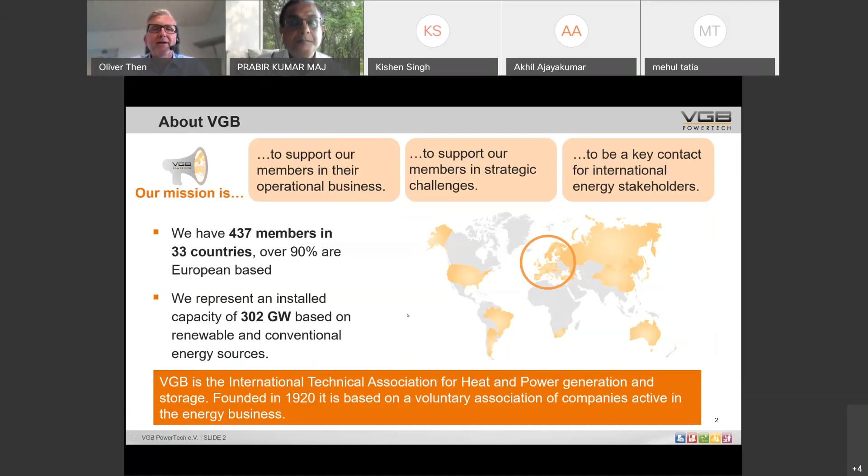Just at a glance, I don't want to run through it in detail, but it's been more than 10 years that we've been active in the Indian power sector, which fills us with pride and has been a very interesting and successful time, mainly in recent years working on the issue of flexibility, and nowadays still working on flexibility, moving also into hydrogen, which was mentioned by the American colleague in session 1 - hydrogen and power to X technologies being the logical continuation of power generation in the future. I'll give a short update on our recent activities further on.

At least in certain countries, and in spite of a still existing share of fossil-fueled power plants based on hard coal, lignite, and gas, this share has a decreasing tendency, because the major part of all investments into the power sector is definitely going into renewables, as is the case in India with the very ambitious goals the Indian government has set, together with the ambitious goals set here in Germany and Europe by the European Commission.

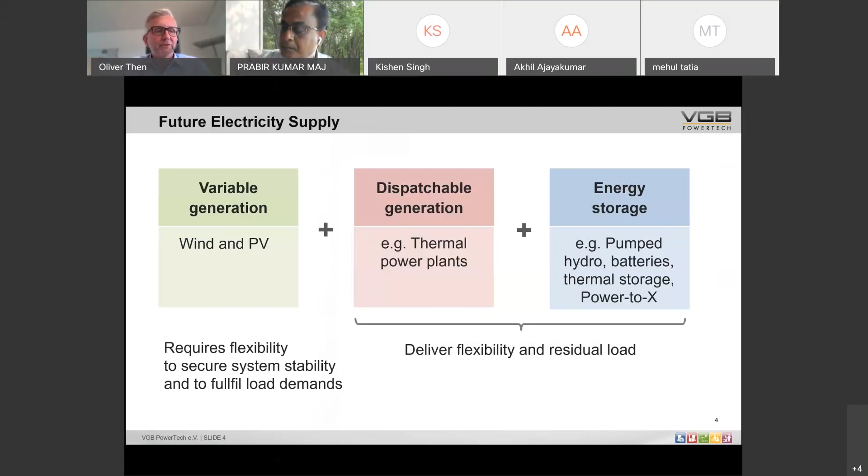But flexibility has an even wider approach. It goes down from day to hour, to minute, to second, to millisecond. And in the other direction, it goes from week to months and from months to season. So the requirements for flexibility are a very heterogeneous and complex environment.

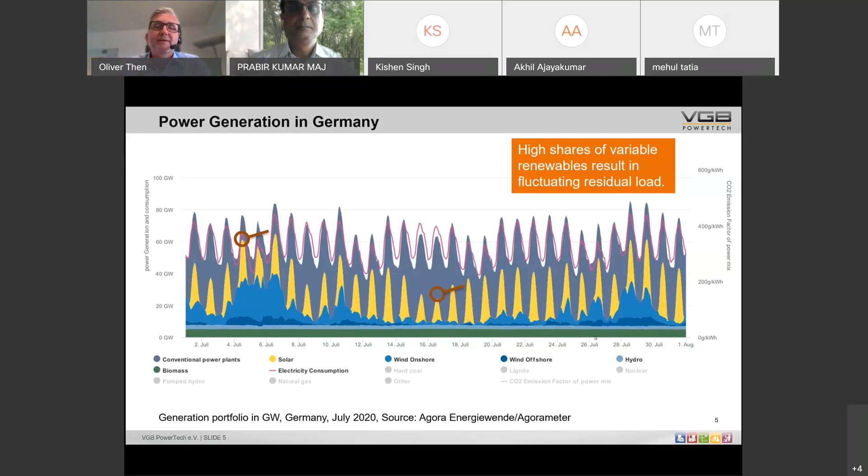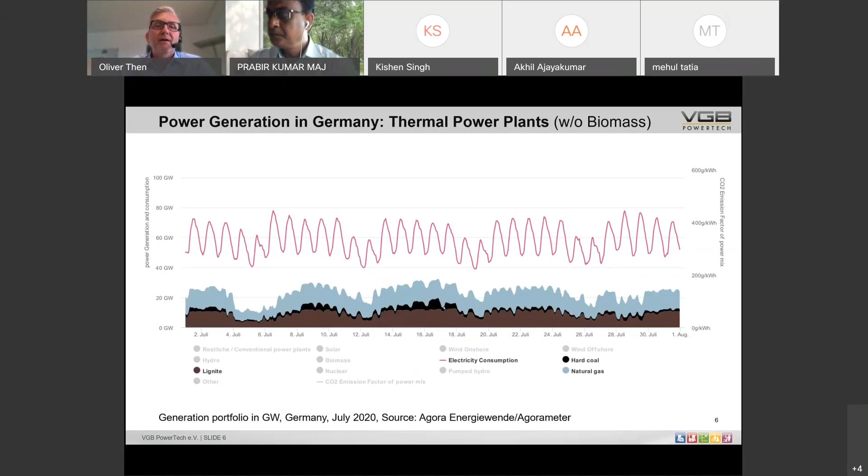Because it allows fast startup and meeting the requirements, and also being able to stay on the grid when there is a high injection of renewables into the market, because staying on the grid at low minimum load is in most cases much more economic than shutting down the whole plant.

And we are not talking only about the startup costs that come again and again if you have to shut down completely. We are also talking about the possibility to continue to provide system services when you are in minimum load. So if you're talking about voltage control or frequency control,

these system services, of course, can only be provided if the unit is still connected to the grid. The second one, advanced dynamics by high ramp rates for shutting down, for increasing and decreasing the load, is of course very important.

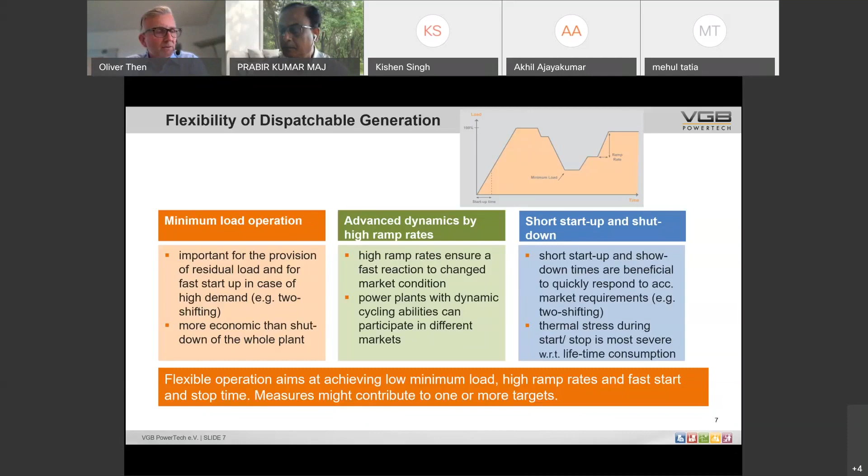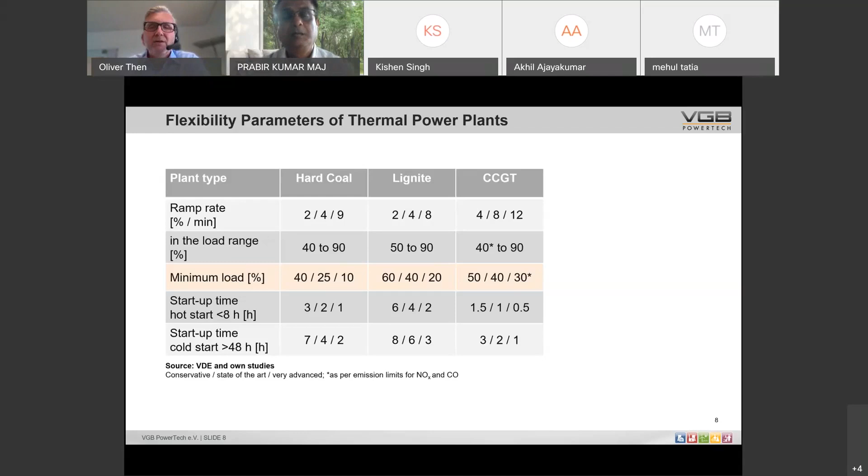So how can we move from left to right in these figures? These are just the keywords, and I think my fellow speakers will go into some more details in the following presentations. The first thing we have learned...

Two more minutes, two more minutes. So you have two more minutes. Please, okay, hurry up. Thank you.

It's a general optimization of instrumentation and control. A high level of automation is in any case beneficial for any kind of flexibility improvement. It's about precise steam temperature control, coal supply, drum level measurement, automated operation and switchover of pumps, fans, etc., and the inclusion of feed-forward control. So this high level of automation is beneficial.

It's crucial, and it's sometimes even quite easy to achieve with less investment. Combustion optimization is a second part, mainly composed of air and fuel coordination by advanced mill operation or advanced monitoring of combustion parameters, which sometimes need a little bit more investment.

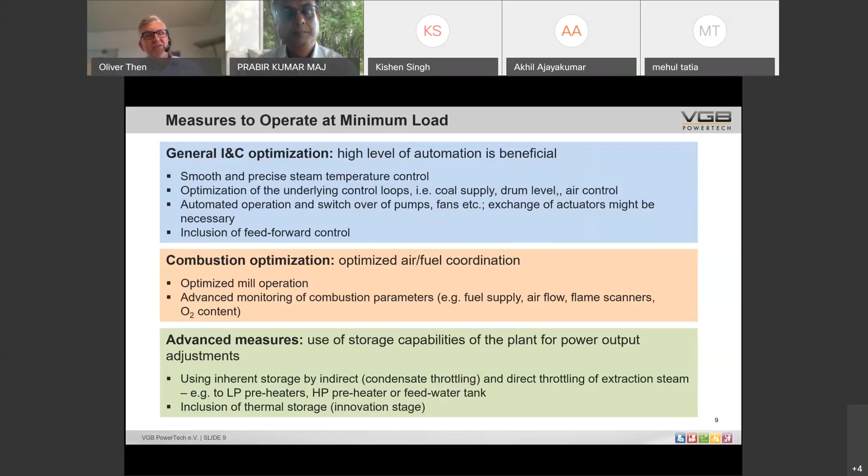And of course you have advanced measures like changing the operational regime, including new means for frequency and power control, or even the inclusion of internal thermal storages. So these are some measures that can be implemented here.

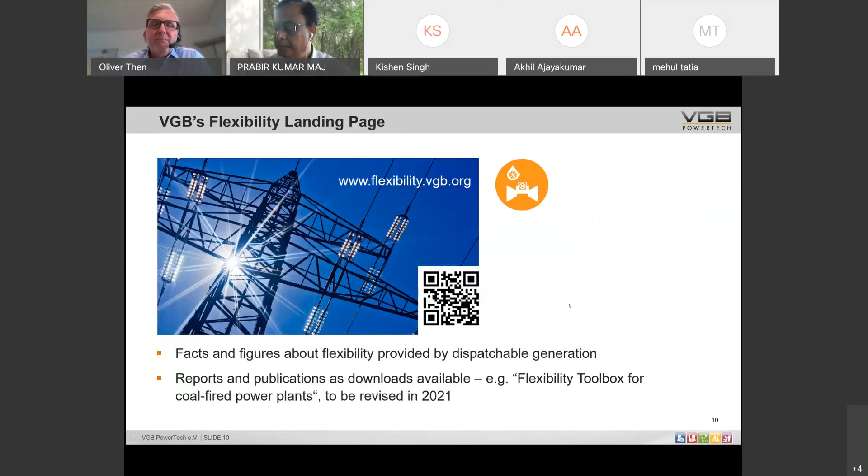We have provided a flexibility toolbox, which you find on our flexibility landing page. Under this URL on the internet, you can find this and a lot of other information for download for free. I can really guide you to this site, our flexibility landing page, where you find an overview of all potential measures that can be implemented to achieve higher flexibilities.

And just as a last slide, the outlook: we have done successful projects, for example at the Dadri power station together with NTPC in a project sponsored by the Indo-German Energy Forum. We have achieved very good results regarding minimum load and ramping tests, as you can see here.

The project was so successful that we are now continuing this in a follow-up project under the Indo-German Energy Forum for further tests and optimizations at the Andal power station operated by DVC and the Maithon unit operated by Tata Power, spreading out the results and learnings also into the IPP sector.

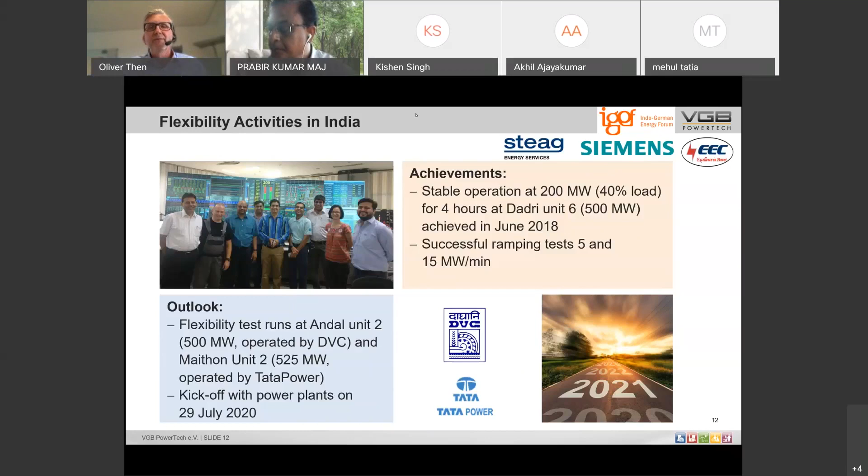And of course, we hope to continue this with all interested power plant operators in India to give our contribution to the further development of this sector in India and to allow more inclusion of renewable energies in the future. If you have any questions, please feel free to contact me, and we would be happy to provide you with more information.

I would also like to address our partner organization in India, the EEC, Efficiency Enhancement Center for the Indian Power Sector, which is cooperating with us to coordinate these projects and take care of the dissemination of results from our experiences in India. Thank you very much for your interest, and I'm open for questions later on. Thank you.

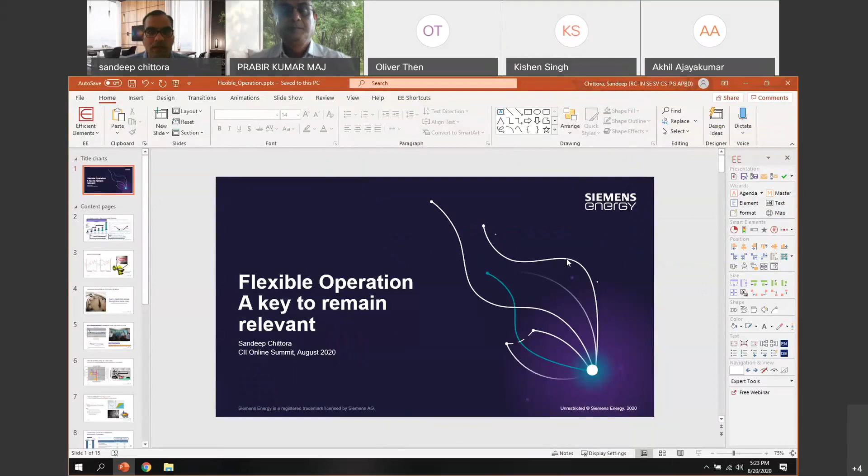So the scenario in India is that currently we are operating close to 370 gigawatt installed capacity, and in that we have 206 gigawatt of thermal power plants.

What we see is a typical scenario: in 2022, as projected by CEA, we will require close to 180 gigawatt of generation during the entire day, or close to that. Thermal-based generation will be 130 gigawatt, but as soon as solar starts coming up or picking up from morning to peak noon, we need to lower our thermal capacity to balance the grid.

This 130 gigawatt is expected to go down to close to 45 gigawatt, requiring a ramp rate of thermal-based generation of around 200 megawatt per minute. Then as soon as solar goes off during the evening, we will have to pick up the load from thermal-based generation, and this ramp rate would be around 220 megawatt per minute.

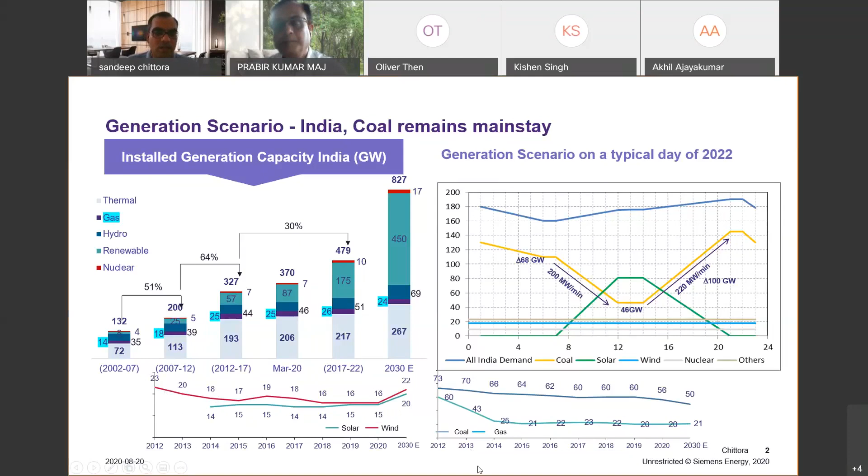So solar will start picking up slightly with renewable integration and with the technologies that are coming up from the thermal sector as well.

Because of this cyclic operation, forced outages based on the number of starts are increasing, as shown in a study done by VGB. If the number of starts increases, the number of forced outages also increases in the same relation, so we see a direct correlation between the number of starts of the machines and forced outages.

On the second graph, we see the equivalent full load hours, meaning if my units are operating almost at 100% load, and if the equivalent full load hours is 50%, it basically means the PLF is 50% on an average basis. So we see that if the equivalent full load hours are decreasing, meaning PLF is decreasing, the number of forced outages is also increasing. It's an inverse relation between equivalent full load hours and forced outages.

We have also observed that on thick wall components, cracks are getting initiated and starting to appear, and this is what we need to address.

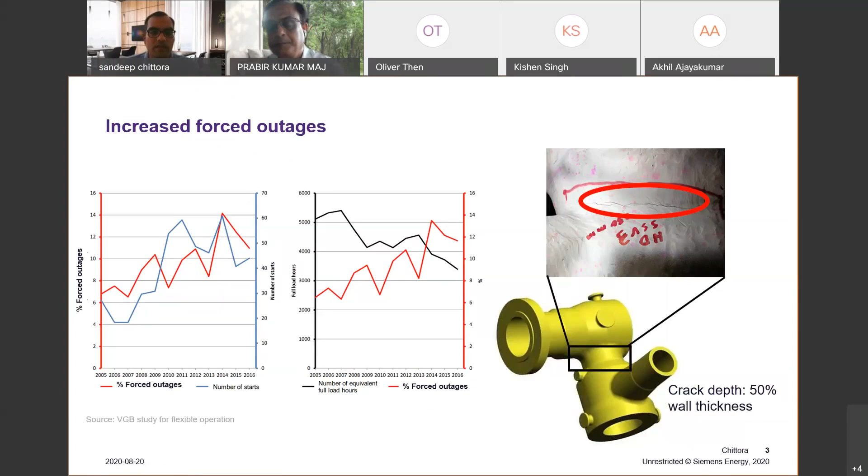We need to have reliable operation in order to bring these coal-based power plants to a lower load, and then also participate in renewable integration in the grid.

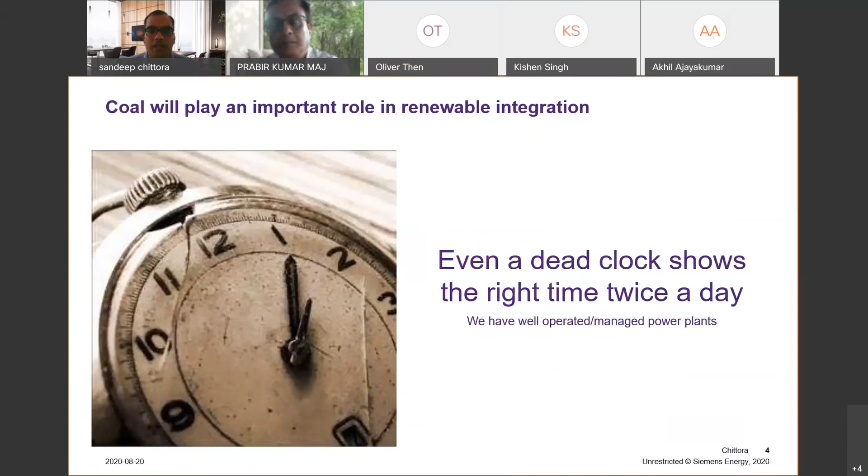So my thought is, even a dead clock shows the right time twice a day, and we have quite well-operated and managed power plants. I think we shall be able to do much better than the scenario where PLF is dropping heavily and renewables are coming in. But coal will also have to play an important role in this renewable integration. This is my thinking, and I will elaborate in my subsequent slide. We have achieved 40% technical minimum, and this is possible.

This we have done together with VGB, which was my former presenter here, and NTPC, which will be done subsequently. As a combined team, we have demonstrated that 40% is possible on Indian coal conditions without oil firing, so nothing to worry about. I think all 500 megawatt units, once we go step-by-step, we will be able to achieve close to 40% technical minimum.

The advantage of bringing thermal power plants to lower load is that we will be able to mitigate CO2 emissions generated by these plants by augmenting solar. Our estimates are that this will be close to around 100 million tons of CO2. The coal conditions used had already high ash and high volatile matter present at this time, but we will also be testing for other volatile matter coal conditions, and we are hopeful we will achieve successful demonstration on these as well.

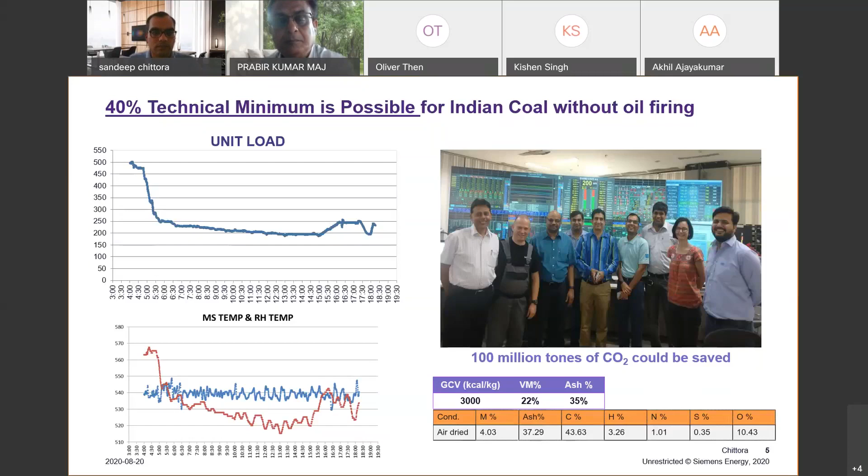The major thing an operator can do to reduce or improve the thermal life of components is two-fold: if he is able to reduce the temperature gradient, which is how much temperature change happens on a component, from 1 Kelvin to 10 Kelvin per minute. If the amount of temperature gradient starts dropping, then we are able to allow more load cycles on a component, which means higher life.

On the other hand, as a designer, if we are able to design the component so that the temperature gradient across its thickness is as small as possible, or the component as thin as possible, then with a lower temperature gradient we are also able to allow higher load cycles. So there are two ways to achieve better fatigue performance in the component.

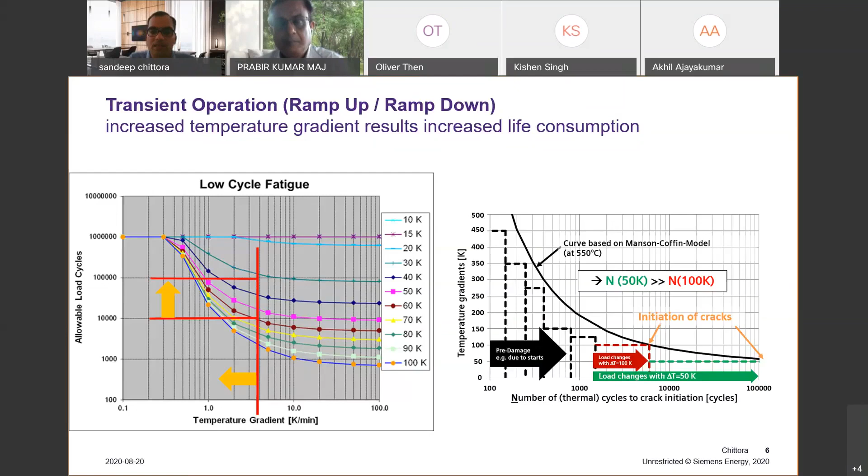This is another way we are able to convert any cold start into, let's say, a warm start. What we are doing here is providing an electrical jacket on the HP and IP turbines, and as soon as we want to start the unit, we can start this electrical heating so the component gets heated up quickly, and we can start the unit faster.

The advantage of this is that once we do a boiler start, we don't have to wait for the turbine to come up to temperature before rolling it. In this way, we are able to reduce the startup time by as much as 60 minutes compared to prior, which means we also reduce oil consumption and reduce the cost of the start. Similarly, we will also reduce the number of operating hours, and the life of the component will improve.

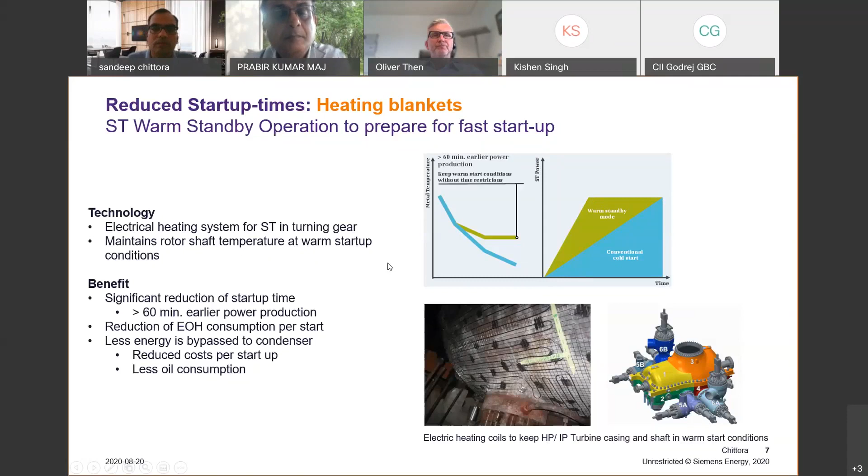So this is a faster startup method that we are seeing. Now I'll present a scenario wherein, like, it's an economic case which I think is beneficial for the grid.

We are assuming that currently the entire optimization, which is on 500 megawatt, is happening because the rated capacity is 500 megawatt, and we see the technical minimum, let's say 50%, coming to 250 megawatt. With modernization of this unit, we can improve this 500 megawatt output to 550 megawatt, and also reduce the technical minimum to, let's say, 40%, to 200 megawatt.

So what happens is, if I have unit A, which is at a pit head station of 500 megawatt, and unit B, which is off-pit and will see the flexibilization, the current operation happening is 500 megawatt here and 300 megawatt here.

If I assume a variable cost of 1.3 and 3 rupees, the annual cost of operation comes out to be 1358, summing together both units.

But in the proposed operation of 550 megawatt and dropping this 50 megawatt to the other unit, our new estimated cost of operation will be 1.25 and 3.05. Based on this, we see that we are able to operate both units, summing almost 800 megawatt, at 1270 crore. So this will give us a saving of 88 crore annually by just optimizing the units together, or putting two units together.

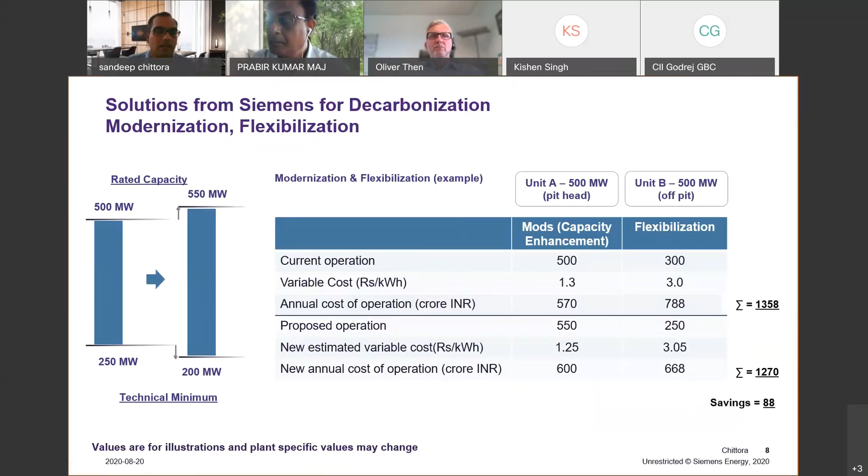A concept which we have introduced in our supercritical unit can also be introduced for 500 megawatt and even 210 megawatt units for improving the faster ramp up. This is again coming together with the electrical jacket as well.

What we are doing here is we are able to reduce the inner casing thickness so that the startup of the unit happens faster. And since they are able to have the faster startup, we save costs.

Similarly, they are also given with interstage admission or overload admission, so they provide the better ramp rate requirement. So if we want to improve the load quickly, we are able to introduce this overload admission and support the grid.

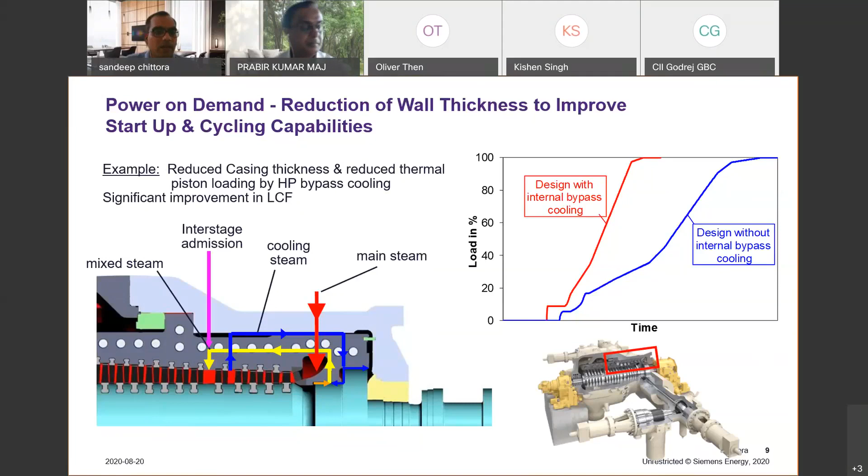In order to monitor what is happening on the steam turbines, we have EOH 4.0, which will account for all the load changes, all the thermal fatigue that is happening, the type of starts that you have taken, and also the actual hours that the unit has operated.

So it will give you equivalent operating hours, meaning an accurate counting of how much life has been consumed for the component.

Based on this, you are able to decide whether you need to take a shutdown, whether you need to really do the maintenance of the unit or not, or whether you can prolong your operation. So this is a solution which comes very handy in order to provide the maintenance of the power plant.

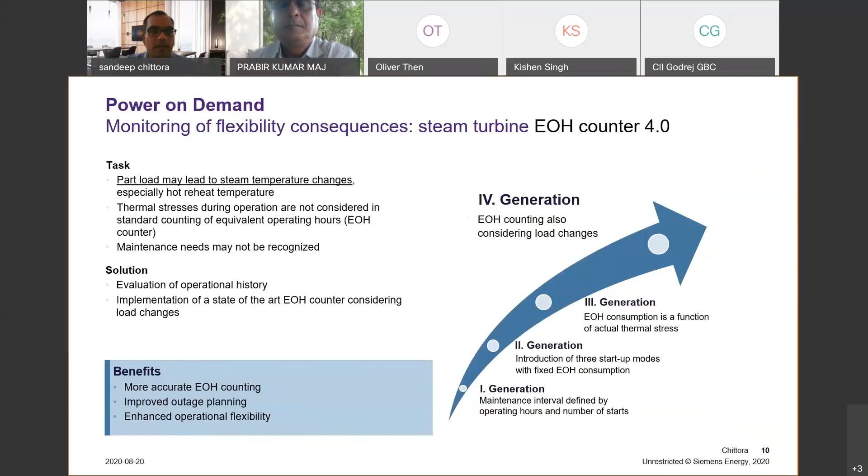Now comes up a unique solution, or I would say a question comes up: once we operate a unit at part load, how do we improve the efficiency?

This unique solution is we are able to introduce a top heater. This top heater actually operates at part load, and once it operates at part load, we are able to maintain the final feed water temperature constant. Since we operate the final feed water temperature constant, the heat load on the boiler reduces, and that's how we are able to improve heat rate.

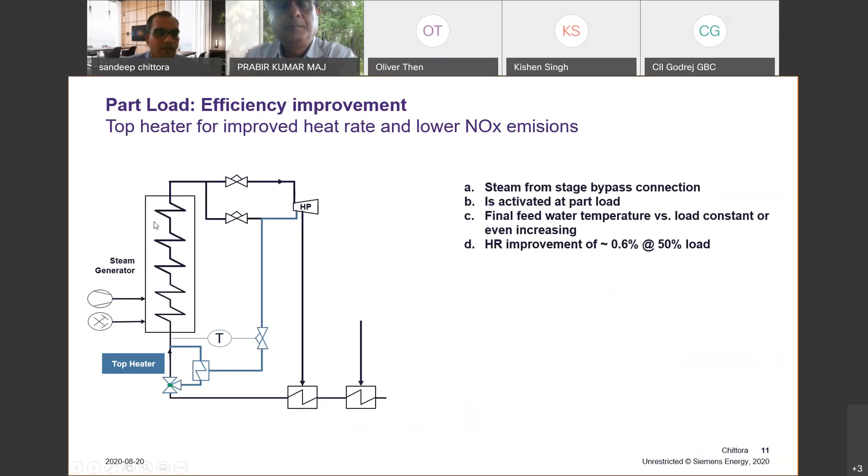This we have demonstrated in a plant in China, Waigaoqiao, which got commissioned in 2008. And we are seeing the heat rate improvement close to 0.6% at 50% load.

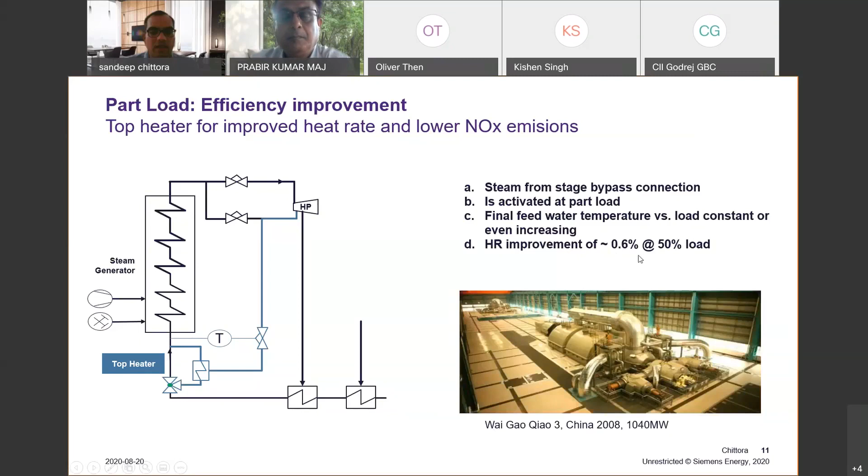Sure, sir, I think it's mostly already done. So if we see that top heater, in normal operation, as we go to part load, it starts dropping. But with the use of the top heater, we are able to maintain the temperature of the final feed water, and that's how we are able to improve the heat rate of the unit.

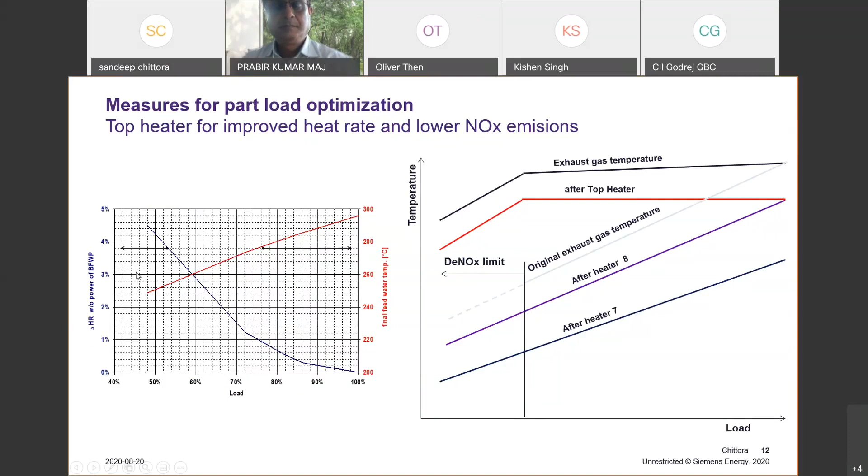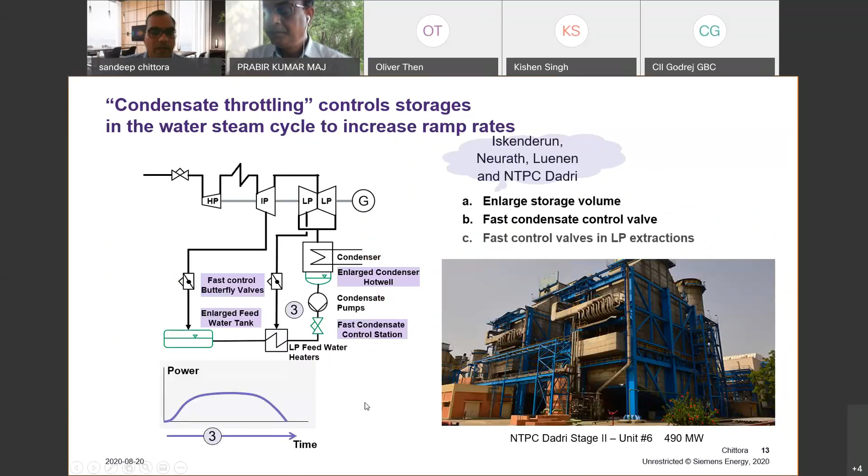Condensate throttling is another unique feature we have done at NTPC Dadri, which is able to provide a fast response to the grid by closing the LP extraction.

First of all, it is political in the sense that it will provide energy security to the country, and that is why we see that it gives us a large potential.

It is economical if we combine it with modernization, which will reduce the cost of operation, as an example I have presented today. It is also social, meaning we can create a lot of jobs and also skill development, because the transition will be smooth.

We have proven technology available, and it will get further developed as the requirement comes in. We work within the legal requirement or legal framework itself, meeting whatever regulatory emission requirements are in place.

And ecological, in the sense that we will be able to reduce the carbon footprint of the country by reducing the load on thermal to integrate renewable energy in the grid.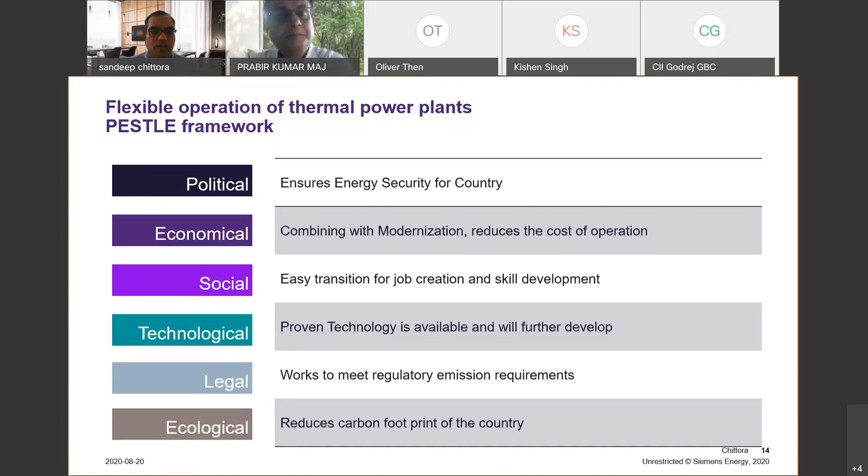With this, I end my presentation. I'm available for questions, and for anything that comes up, you can always contact me on these flexible operations. Thank you.

Thank you, Sandeep. Very nice presentation. You have left a lot of thoughts which, whether you can be connected, maybe the users can take benefit out of that.

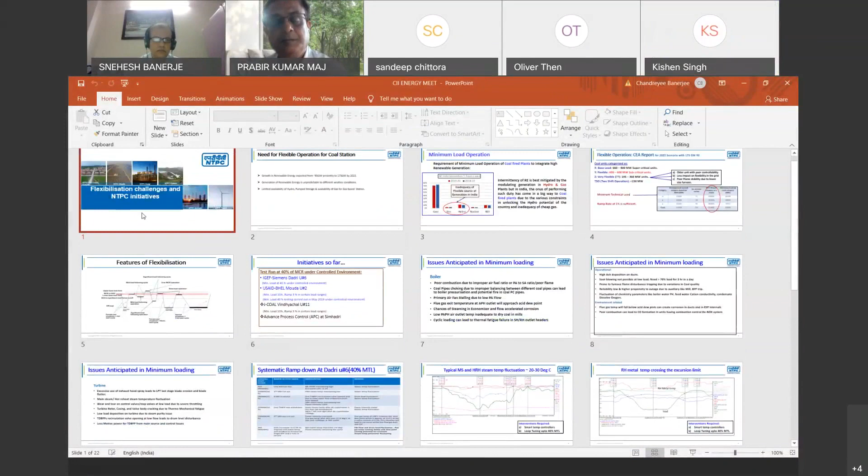Thank you so much, Mr. Majumdar. In fact, all three of us, the panelists, are working together unitedly in the mission of succeeding in this particular aspect, the flexibilization challenges in India. In fact, VGB, Siemens, and NTPC together had taken up some pilot studies, and based on that, we have developed the foundations of moving ahead.

Sir, probably you have touched upon this 85 gigawatt of power, renewable energy, which is unpredictable and with different weather conditions, and the limited availability of hydro, pump storage, and other gas stations really force that there is no other option but to flexibilize the coal units.

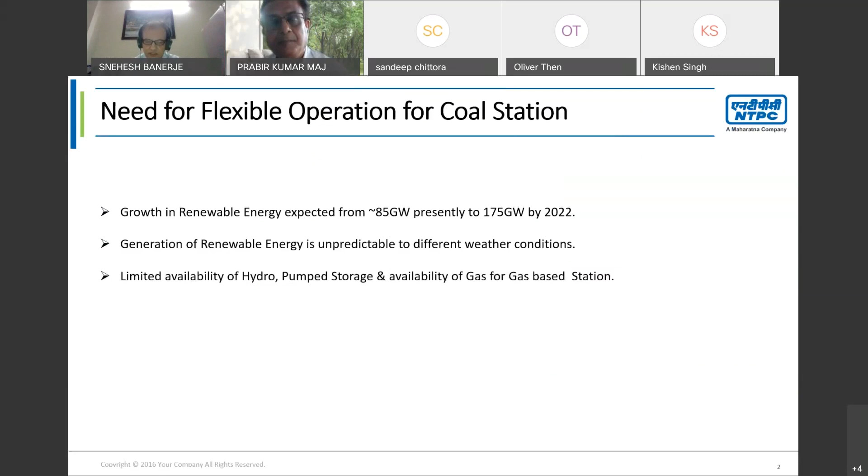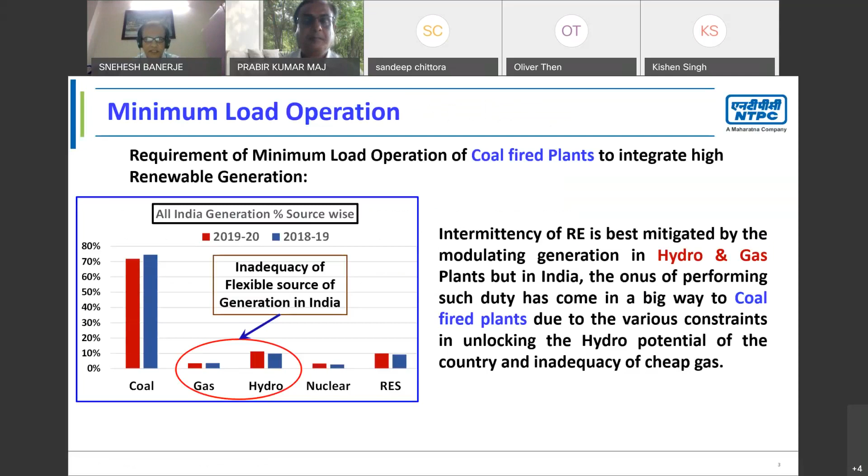In fact, the flexibilizations are being recommended to the extent of minimum loading up to 40%. It is visible in different CEA reports that by 2022, when 175,000 megawatts of renewable power comes into the grid, we may have to come down up to 40%, and even then there may be some units which will be under reserve shutdown.

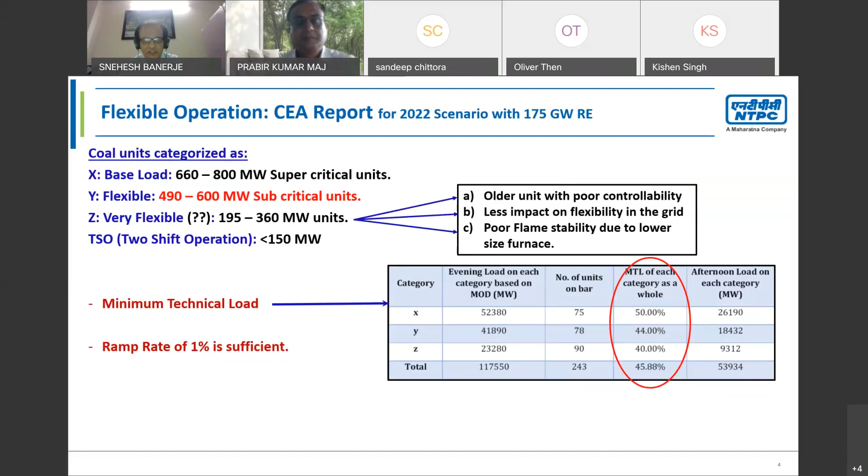As we are witnessing nowadays, either the units are running at full load or units are in stop conditions, in reserve shutdown conditions. Even very high efficient units, the supercritical units, are in stop condition, because they are located in non-pithead areas and their power cost is a little bit on the higher side, even though they have an efficiency heat rate to the tune of 2000, 2100. This is the situation in India nowadays.

The features of flexibilization have multiple facets that I want to touch on here. First of all, the reserve shutdown. Reserve shutdown is also of different types. It can be a very short shutdown, short duration, 1 or 2 days. It can be a 7 day duration shutdown, or it can even be a months-long shutdown. Some of our units are shut down for months, so the approach of addressing all those reserve shutdowns is entirely different.

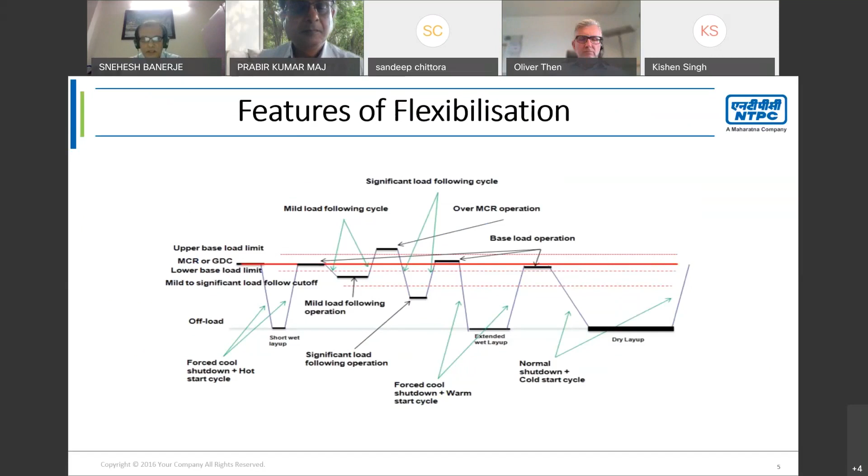The way we should handle a shorter wet layup will be entirely different from the dry layup, what we normally do for units which are under shutdown for months together. So these are the different aspects of reserve shutdown.

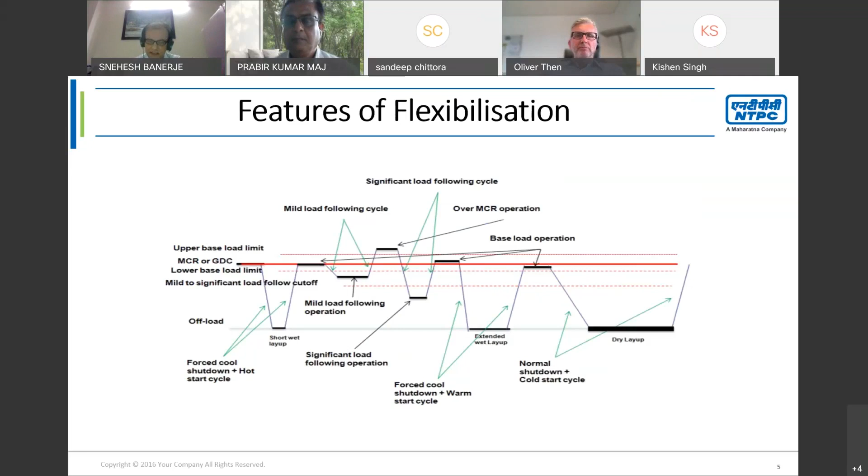Apart from that, there are minimum loading operations, significant load following, maybe minor load following of 30, 40 megawatts, and all these different dimensions of flexibilization we are witnessing in NTPC across different fleets. Apart from that, RGMO and the grid response methodologies are also part of it. I think this should also be covered in the flexibilization gamut. So altogether these are the aspects of flexibilizations.

The major thrust of the study was minimum loading operations with a higher ramp rate to the tune of 3%. As we have seen, VGB experience shows they are having 4%, even 9% ramp rate. But in Indian conditions, the concept of ramp rate is a little different. What we perceive as ramp rate is from technical minimum load 55% to full load 100% in one go - only then can we call it a ramp. So it is not a smaller load range ramp, it is a very larger load range ramp that we are experiencing and pursuing.

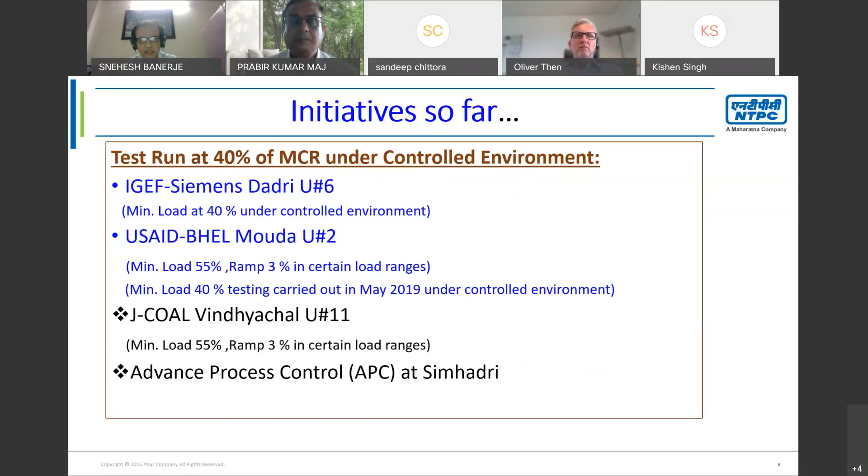And advanced process control, that is another flexibilization approach we are taking at Simhadri. So multiple ways we are pursuing this, and now we want to touch upon the issues which are really affecting our power station's life - the impact on power station equipment through flexibilization.

These are some aspects we want to highlight here: poor combustion, the compromise in the combustion regime due to improper air-fuel ratio, primary-secondary air ratio. There may be coal pipe choking, improper balancing in different coal pipes. There may be primary air fan stalling due to low primary air flow at 40% minimum load.

Flue gas temperature exit at the air preheater can approach the acid dew point, which can come down around 105 degrees centigrade. There are chances of steaming in the economizer as we come down to lower drum pressure, with the saturation temperature - at that point economizer steaming can take place. Similarly, low air preheater temperature sometimes can lead to situations where coal drying will be an issue. The cycling loading can lead to thermal fatigue in the superheater reheater outlet headers.

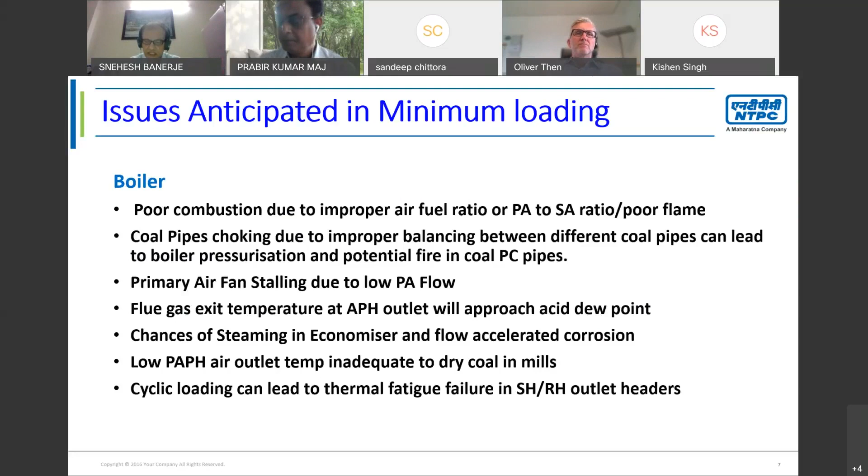So these are some aspects, but one thing is sure - the boiler is the worst hit across all the gamut. On the operational aspects, I want to highlight: high ash deposition on the ducts, soot blowing is not possible at low load. These are operational problems - prone to furnace flame disturbance, tripping due to variation in coal quality.

When we run the unit at 40% minimum load, we have to run with 3 mills. The tripping of a single mill can lead to the tripping of the unit. So that sort of uncertainty we are passing on.

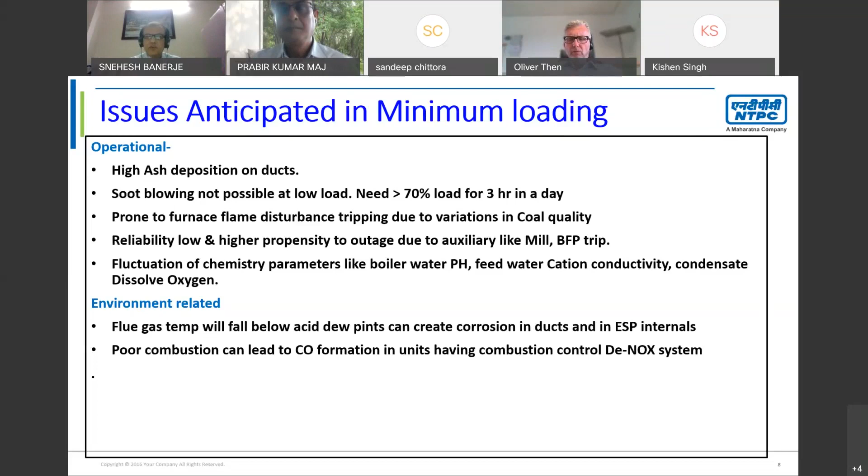Similarly, the fluctuation of chemistry parameters, as we rightly said in the beginning, is very crucial with respect to minimum load operations. And some environmental aspects are also there - flue gas temperature falling below acid dew point, and poor combustion can lead to CO formation.

Similarly, in the turbine, though it will follow, it will not be immediate. The effect on the turbine may not be immediate in nature, but there are steam temperature fluctuations, excessive use of exhaust hood spray in the LP turbine last stage, wear and tear of control valves because of severe throttling, and low load deposition due to poor regime chemistry on the turbine. So these are some of the effects on the turbine.

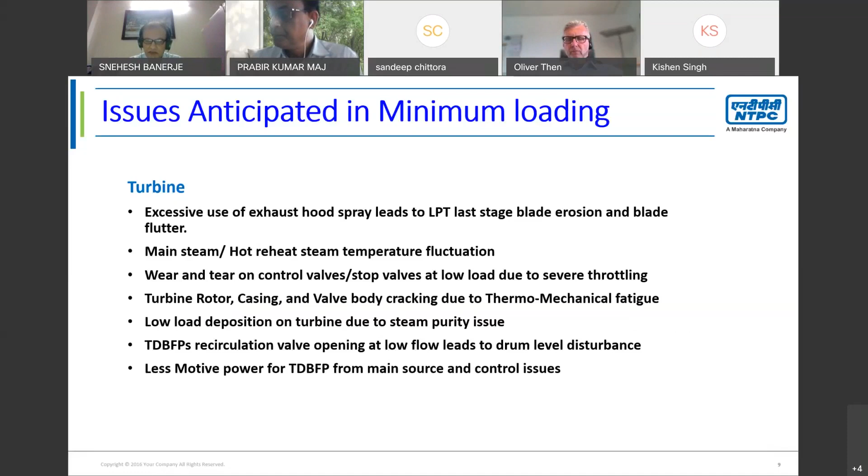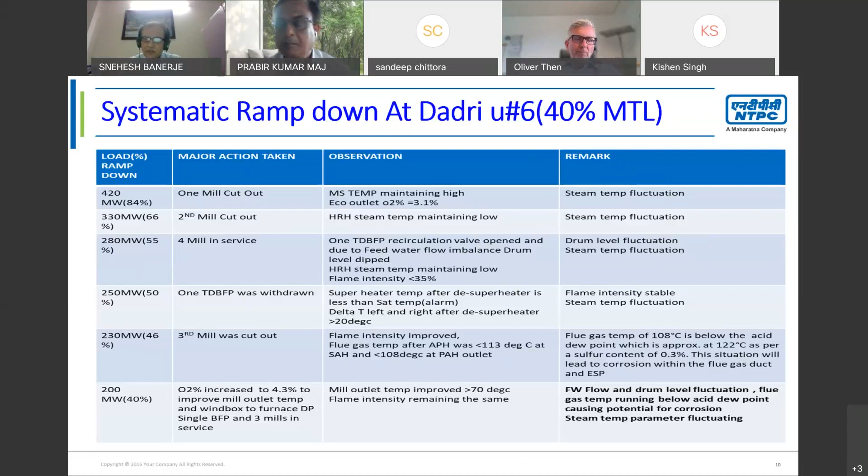This slide shows how we come down to minimum loading at unit 6, where we achieved 40% minimum load. The last column, the remark column, shows it was successfully operated at 40%, but with the caveat that there are a number of variations in terms of parameters - steam temperature variation, drum level fluctuation, flue gas temperature coming below acid dew point. So the parameters deviated in multiple ways.

And this is the area I'd like to highlight here - how different important parameters can fluctuate and deviate during minimum loading and higher ramp rate operation. When we operate at a higher ramp rate, our main steam and HRH steam temperature will fluctuate, maybe to the tune of 20 to 30 degrees centigrade. But these fluctuations will lead to issues.

As our friends from Siemens have told us, this can affect the fatigue of the equipment. So temperature fluctuations need to be minimized to certain limits - 8 degrees, 10 degrees, 15 degrees - that much can be allowed even when running with a higher ramp rate. So how do we minimize that?

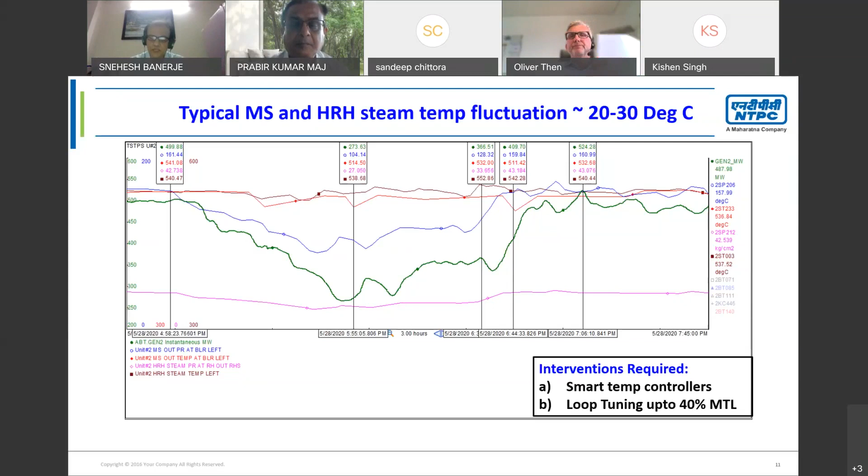So interventions in these areas, maybe with some smart temperature controllers, what we are experiencing with the help of Siemens and other OEMs to introduce these things, which are a little bit smarter. The controllers are smarter. They will act proactively rather than reactively, what is presently in the loop tuning system. So that is the temperature part.

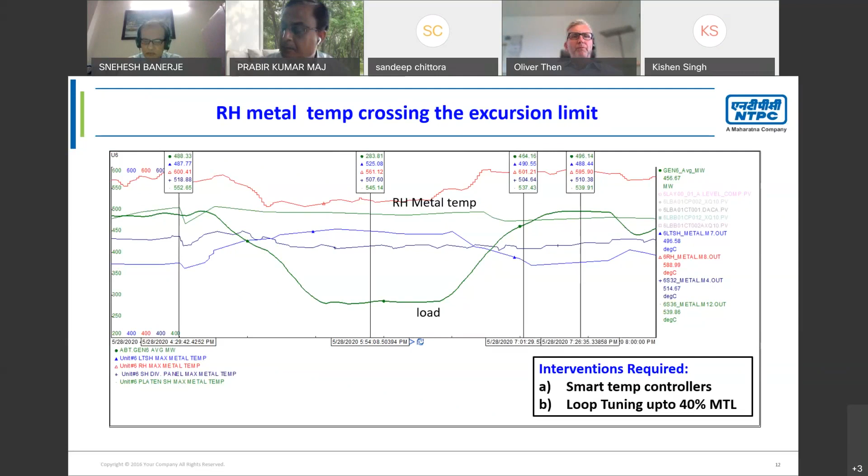And then reheater temperature, it is another area where sometimes it crosses the excursion limits. And again, this smart temperature controller can help us with respect to containing these temperatures. Basically, the advanced process control what we are introducing at Simhadri, and some of the aspects at Dadri, which will really give us some sort of confidence that, okay, with this smart temperature controller, we can go ahead without having deviated these parameters too much.

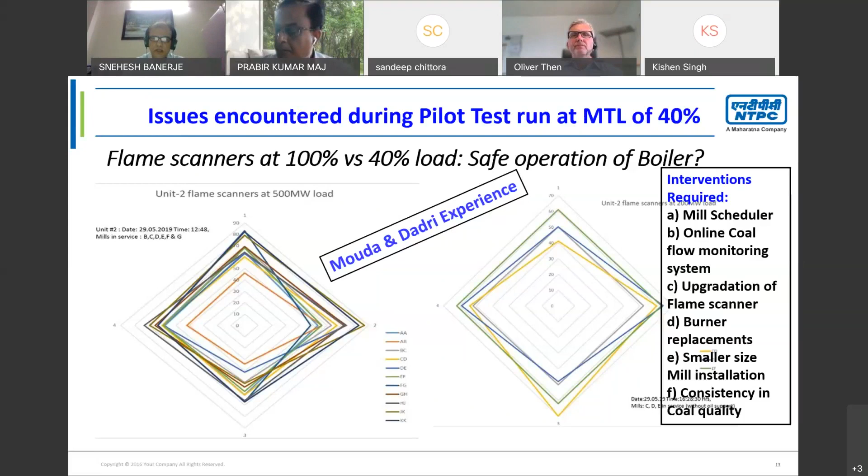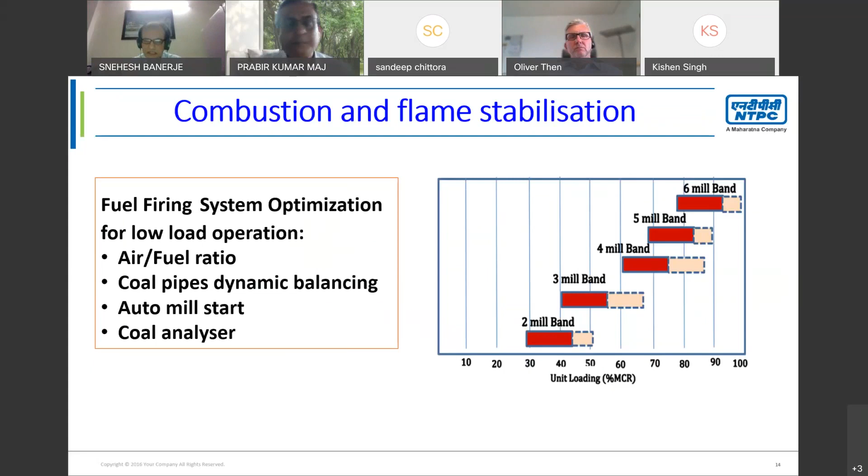So these are some of the interventions we can think for. Similarly, this is another area where we have to optimize the number of milling systems. This is also crucial along with that flame scanner, where from say 7 mills to 6 mills, then 4 mills, then 3 mills. Sometimes operators are to some extent hesitant to come down so much in optimizing the number of mills. But this is most crucial, and the mill scheduler will dictate to come down to optimize the number of milling systems. Another point, the drum level fluctuations, where we have seen that our TDBFP recirculation valves, which are on-off type, can lead to some problem with respect to drum levels.

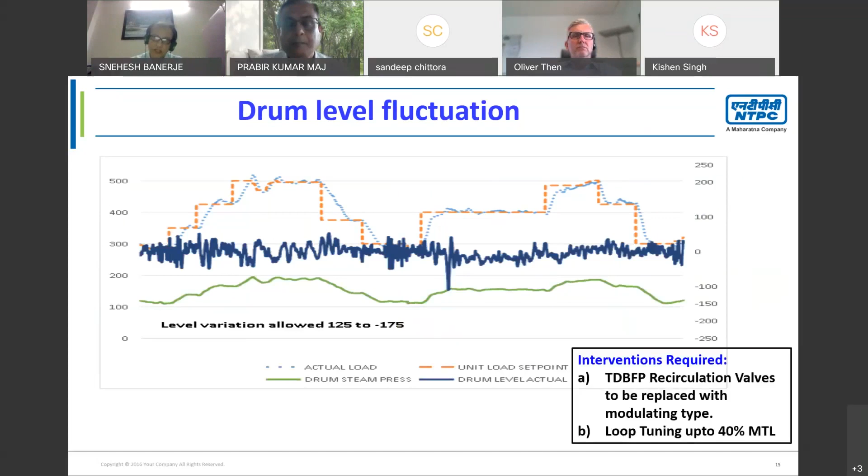So we are replacing those valves with the modulating type, and of course, the loop tuning of drum levels can also play a very crucial role here.

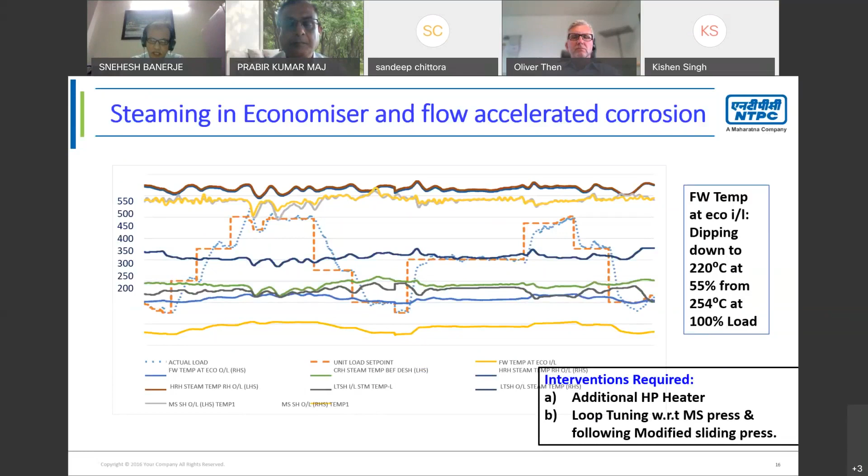The steaming of economizer, yes, economizer steaming is an issue, but we can optimize our sliding pressure operation to modified sliding pressure operations to avoid this type of steaming situations. But at the same time, as Mr. Chittora had pointed out, the provision of additional HP heater can be extremely helpful in managing this type of issues.

Primary airflow is another area where we come down to 40%, air will come down, and as a result, with the 2 fan operations, one fan or both the fans can go into a stalling zone. So the solution in this case will be automations again, where we can automate the system and come down to single fan operation, both FD and primary air, and optimize primary and secondary at lower load.

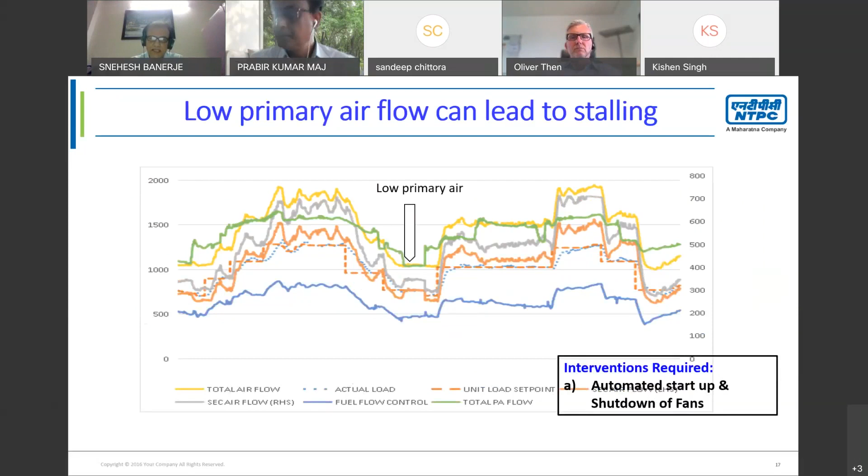This is a typical ramp rate what we are nowadays pursuing, and in fact it is a step function, because we do not have milling system automation. So you have to take a ramp, then again take a pause for stabilizing the boiler and taking the mill into service, and again taking another ramp. So it is a step-by-step way we are moving, and now it is a mandate for all power generating units to follow a 1% ramp.

And in fact, the number of ramps coming are so much in some of our units, particularly at mid-cost units and the units located at non-pithead stations. They are having a multiple number of ramps, maybe 10, 12 ramps in a day we are experiencing. And this type of ramping along with this temperature controller, smart controller, we cannot sustain, because all those ramps can lead to temperature variations and a lot of aberrations in parameters.

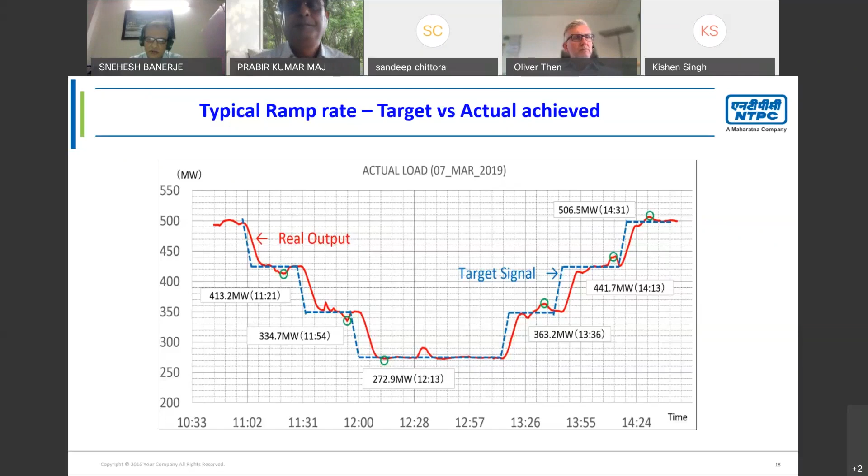So, Mr. Banerjee, please, yes, speed it up. Yes. Yeah.

This is one of the most important aspects of how we can move ahead. One is training awareness. Another is implementation of experimentation and modifications. At the same time, we have to have a defense strategy, just like the turbine stress evaluator. We have to install the boiler fatigue monitoring system, and introduce equivalent operating hours, as we've seen how this type of defense strategy can be adopted to minimize the impact.

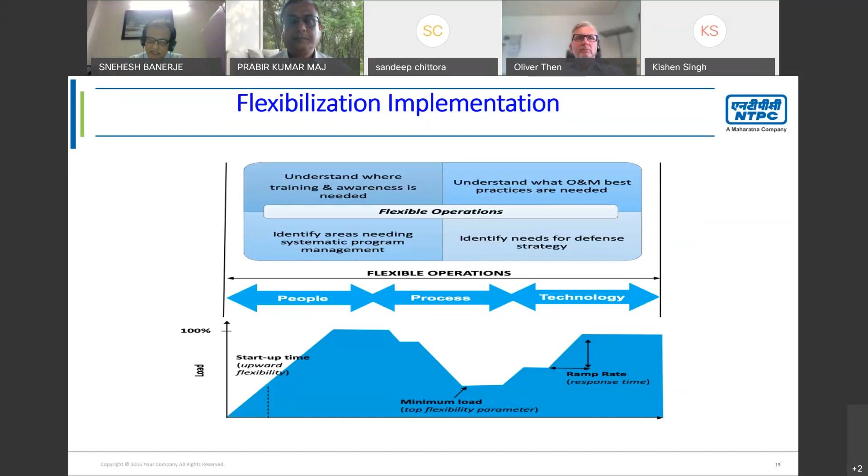This is the Dadri Unit 6, along with a host of solutions - a basket of solutions, in fact. From that, we have to select based on the unit specifics, the equipment, the coal used, and our pilot study experience. We can select some of the solutions and implement them. These solutions are not standard; they will vary from station to station.

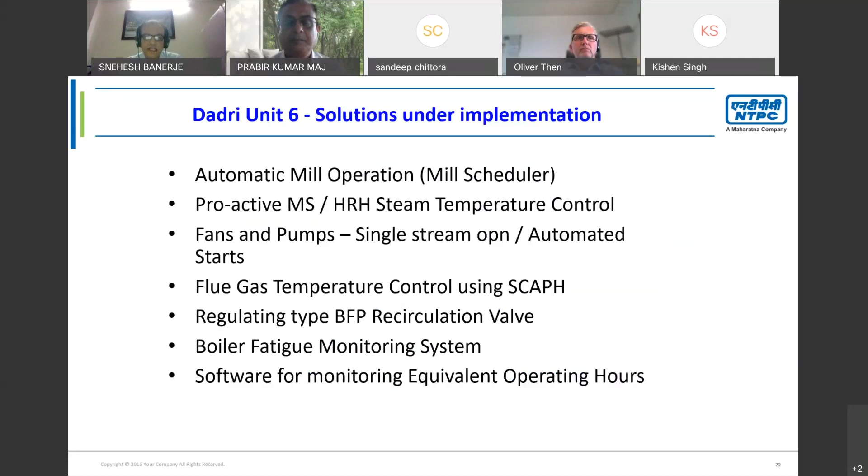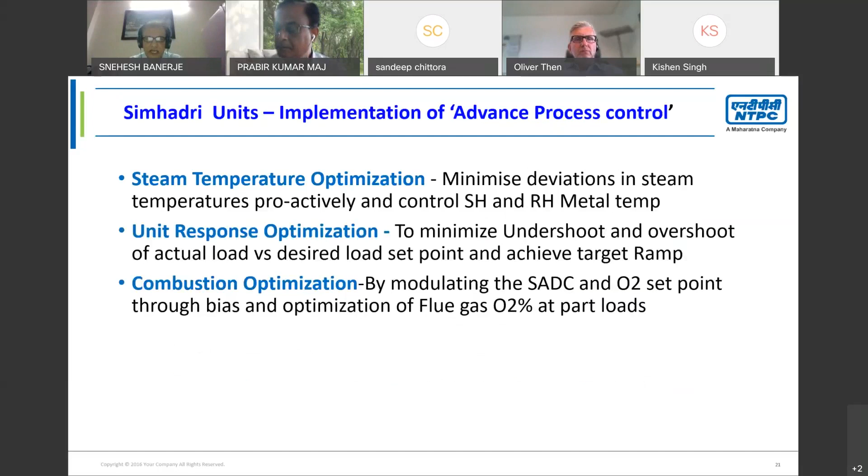This is the Simhadri experience, where we are introducing advanced process control where steam temperature, unit response, and combustion optimizations are taking place, and we are implementing all of these. So Dadri and Simhadri experience are really on. What we can conclude is that with the experience of Dadri and Simhadri, we can come to some conclusions on how we should move ahead in this way of absorbing and integrating renewable power into the grid. Thank you, sir.

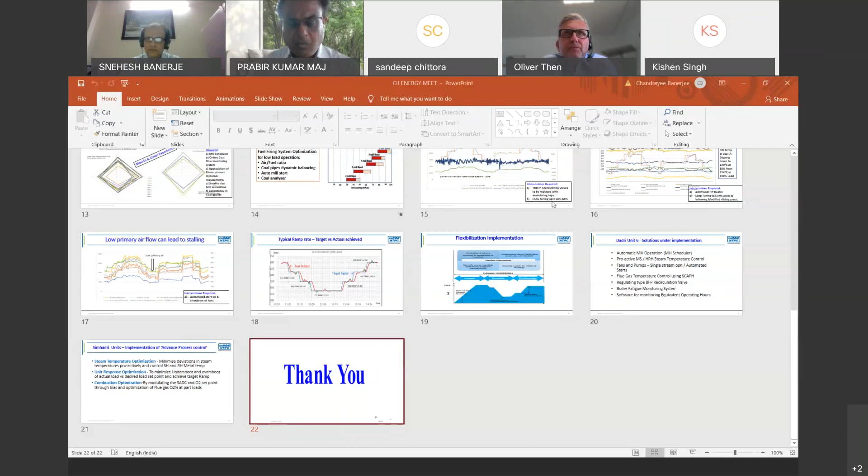One question to my mind, I don't know who is going to answer this: you talked about the experimentation on 500 megawatt units, which is a subcritical unit. So what is your experience with supercritical and ultra supercritical units in India for flexible operation? If you can quickly answer, Snehesh, if you can.

Yeah, can I answer that? Sir, one of the basic objectives in our mind as an organization, not sector-specific but as an organization, is that these supercritical units, which are extremely high efficiency - 2000, 2100 kilocalorie - because they are located in remote areas or away from coal mining areas, those units are under shutdown condition. This is a highly precarious situation.

So we should not touch those units. There should be some methodology of running those units, and we should flexibilize the units which are 500 megawatt, because if we flexibilize the 500 megawatt, a greater quantum of flexibilization is possible - we can come down from 500 to 200 megawatt, so 300 megawatt of margin is available. In case of 200 megawatt, those are older units, and as you can understand, this is about control methodology - the more advanced the control, the easier it is. For 200 megawatt, it's extremely difficult to come down so much, with such a higher ramp rate. So that's the reason why we are focusing on 500 megawatt.